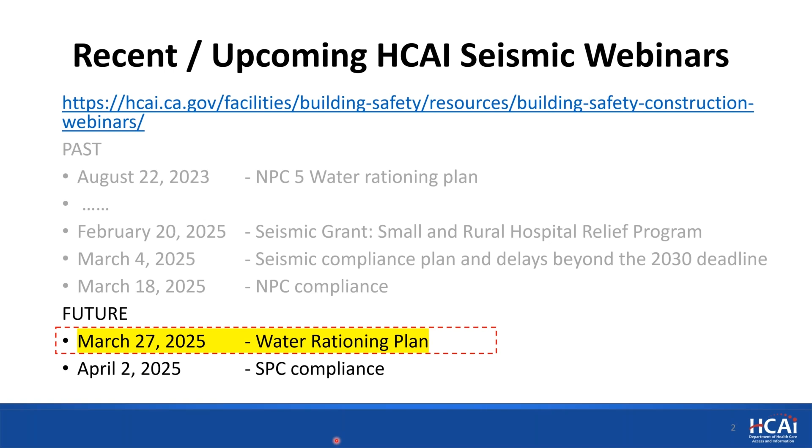Recently, Ali Sumer gave webinars on the seismic grant program for small and rural hospitals, another one on seismic compliance plans and delays beyond the 2030 deadline, and the most recent one was the NPC compliance webinar. Today's webinar is on the water rationing plan. Another upcoming webinar on April 2nd is on SPC compliance.

I recommend reviewing the previous webinar on the NPC5 water rationing plan that was presented in August of 2023. That was a 2-hour webinar and it went into much more detail regarding the NPC5 code requirements, evaluation, and report preparation. Today's webinar will focus on the submitted evaluation reports and discuss ongoing water rationing strategies, challenges, approaches, some frequently asked questions, and also we'll try to go over some examples.

Let's go over some relevant codes and their effective dates. To clarify one thing, there is no change to the NPC regulations for this upcoming code. The final express terms for the California Administrative Code were filed with the Secretary of State on February 27. These regulations will become effective on March 29th, 2025. That's 30 days after filing. Since today is the 27th, this will be effective 2 days from now.

In this presentation, we'll go over the relevant upcoming changes in the 2025 California Administrative Code, especially pertaining to timelines. One important thing to note is the 2025 Building Code is effective January 1, 2026. So there is this important distinction. The California Administrative Code will be effective in 2 days, end of March, and the California Building Code will be effective January 1, 2026.

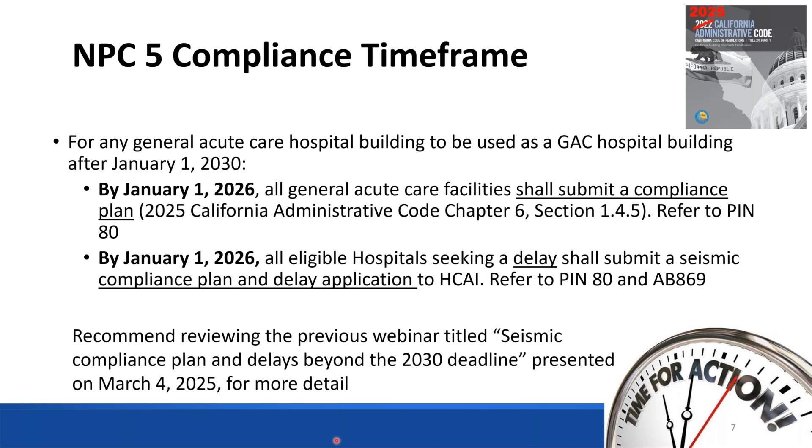The next deadline after that is March 1, 2026 for submitting construction documents related to NPC 4, 4D, and NPC 5 to the office. Note that the deadline has changed from previously being January 1 to now March 1. This change is part of the upcoming 2025 California Administrative Code.

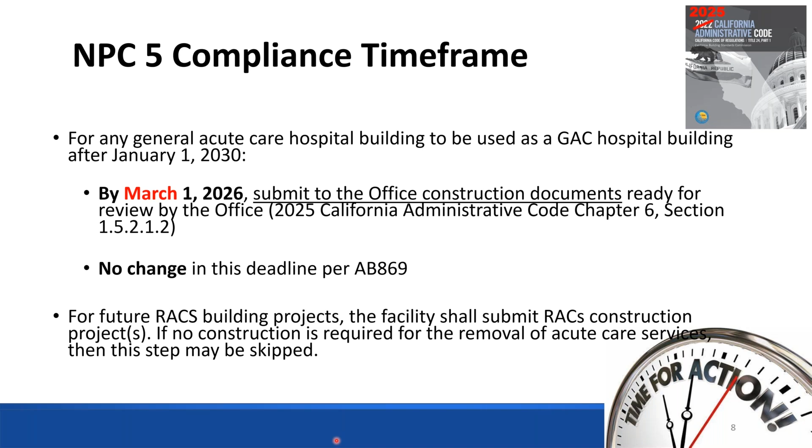For the facilities submitting delay application per AB 869, this deadline does not change. Similarly, for non-conforming buildings that are proposed to be removed from acute care, that is, the plan is to decommission or demolish, the facility shall submit a RAC's construction project. If there is no construction, then this step can be skipped.

The next deadline after that is March 1, 2028 to obtain a building permit to begin construction for the NPC compliance projects. Again, please note the change in the date from January to March of 2028. There are some exceptions in the code, but in general, the hospitals not meeting this deadline are not issued a building permit except for seismic compliance work, maintenance work, or emergency repairs. You can find these exceptions under the 2025 California Administrative Code section listed here on the slide.

Similarly, for facilities submitting a delay application per AB 869, this deadline does not change. For non-compliant buildings planning to be removed from acute care services, the RAC's construction project building permit needs to be obtained by March 1, 2028.

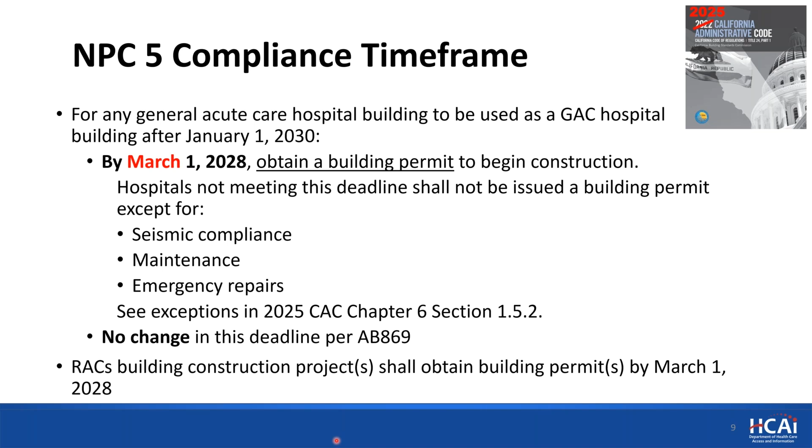So by January 1, 2030, the general acute care building shall achieve NPC 5 rating. That means finish construction, obtain a certificate of occupancy, and receive the NPC 5 rating. For buildings with approved delay dates per AB 869, they will need to meet the deadline as outlined and approved under their specific seismic compliance and delay plan. Again, as a reminder, these requirements only apply to facilities with non-compliant buildings. Compliant buildings are the ones with SPC 3 or higher rating and NPC 5 rating.

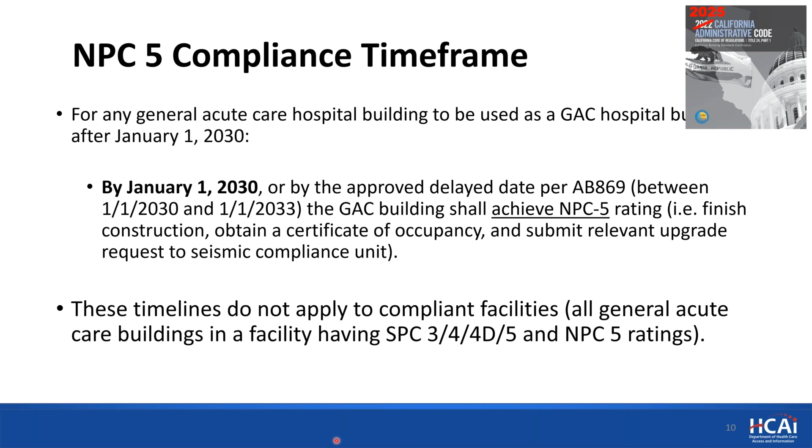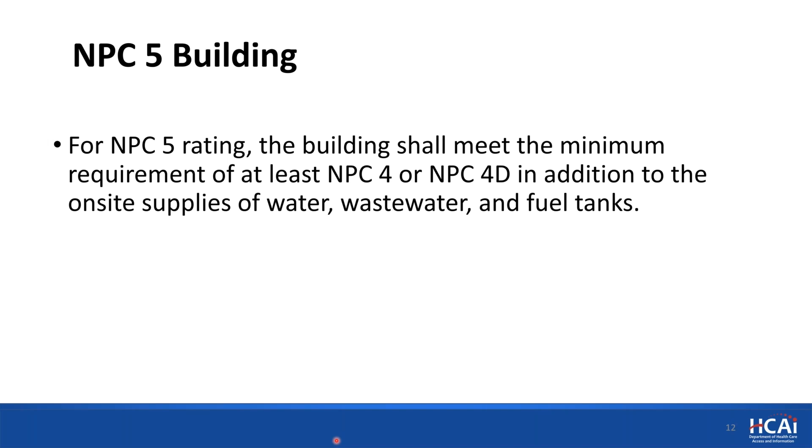Let's briefly go over NPC 5 and its main requirements before we jump into the water rationing plans. For a building rating to be NPC 5, the building needs to comply with a minimum NPC 4 or NPC 4D rating. You can see this section from the California Administrative Code here outlining this criteria. For a building to be NPC 5, the building has to be NPC 4 or 4D first. And in addition to this, it has to have a sufficient on-site supply of water, wastewater, and fuel to provide for radiological and acute care operations.

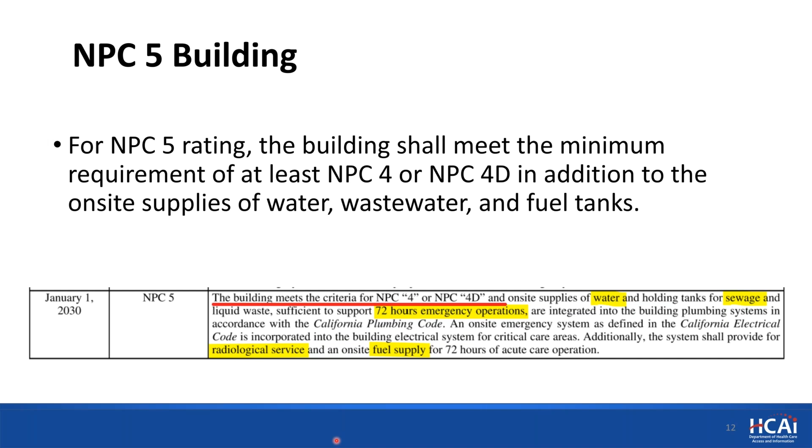This helps the hospital to be operational without outside support for 72 hours and provide emergency services in case of earthquake or other disaster. An NPC 5 compliant hospital facility is capable of supporting 72 hours of emergency operations during widespread damage caused by a major earthquake. With all major earthquakes, we have seen damage to not only buildings, but critical public infrastructure as well. The intent is to treat the hospital facility as an isolated place that is self-sufficient and reasonably capable of providing services after disaster. This is especially critical in the initial time before help from outside can start.

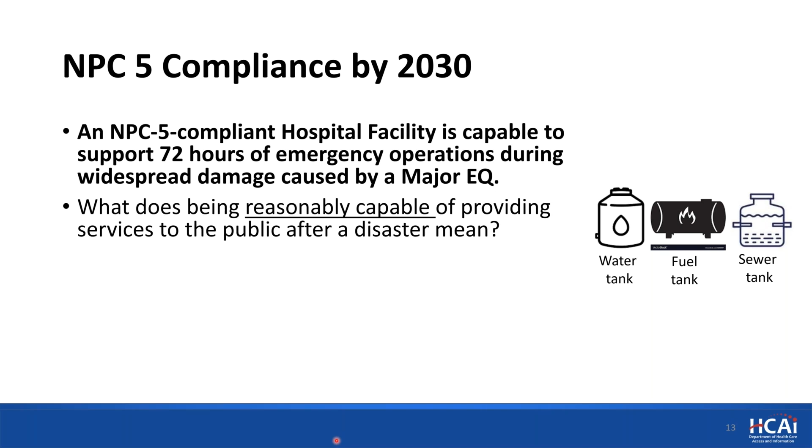So what does being reasonably capable of providing services to the public mean? For our purposes here, we are looking at these main items: water storage, which is part of the water rationing plan, wastewater storage, radiological services, and fuel storage for e-power or for the emergency generator. Then on individual building level, we want to look at bracing, and last but not least, the structural performance of the building. SPC 3 or higher rating is considered a compliant building. Again, our presentation today is going to go over a portion of the NPC 5 requirements that are specifically related to water and wastewater.

The code requirements are listed across multiple locations. California Administrative Code provides the definition of NPC 5 building under Table 11.1 and also timelines and deadlines under Section 1.5.2. California Building Code has NPC 5 requirements for new construction. California Plumbing Code has information on the minimum water requirements under Chapter 6, and it has the wastewater requirements under Chapter 7. Similarly, California Electrical Code provides references to NFPA 101 and 110 for the on-site fuel requirements.

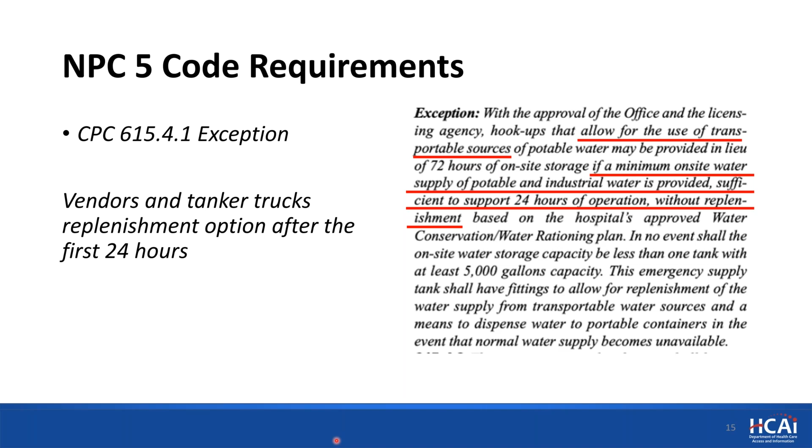Just briefly talking about tanker truck exceptions. This is an important exception in the code that's being utilized under multiple proposed rationing plans. This exception allows for replenishment of water as long as a minimum of 24 hours of water is provided on site, and the contracts with vendors are made for the second and third day to maintain 72 hours of continued operations. We'll go more into details later on the tanker trucks and vendors in today's presentation.

Now going over some updates and improvements we have made recently to the NPC 5 application process. The original applications were submitted for each building separately. To help streamline the application process, since the initial submission, we have made further improvements to allow for a single primary NPC 5 project that is related to multiple buildings. This effort will save time in the long term and simplify the process. When submitting back check responses, please use the primary project number.

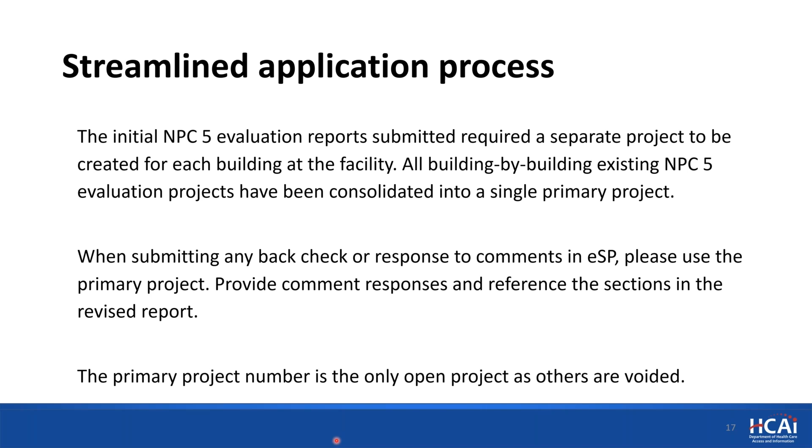Except for the primary project number, all other project numbers are voided. So when submitting the rationing plan, please be clear in mentioning all the buildings the evaluation report applies to. Essentially, all general acute care buildings that plan to remain operational beyond 2030 need to be NPC5.

This includes canopies, equipment yards that might not require water, wastewater, or fuel. Just to clarify why we are asking for this is because we don't know if these canopies or structures require water or e-power. It might be obvious for the facility or the design professional familiar with the facility. So the design professional can state that these structures don't require connection to water, wastewater, or fuel, but as long as it's included in an NPC5 report, that should be good.

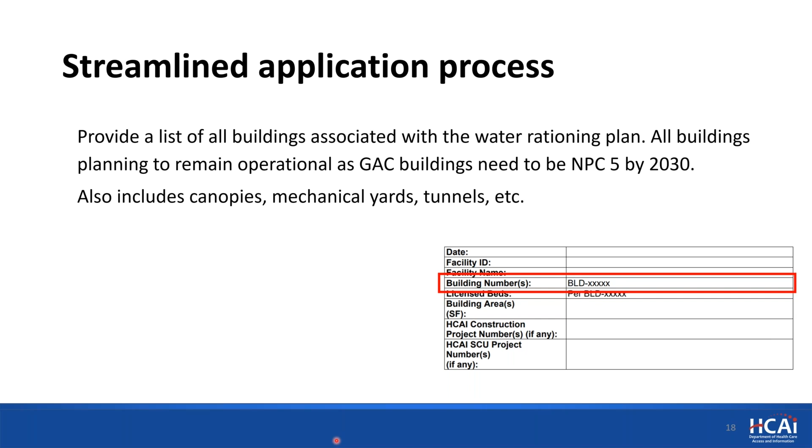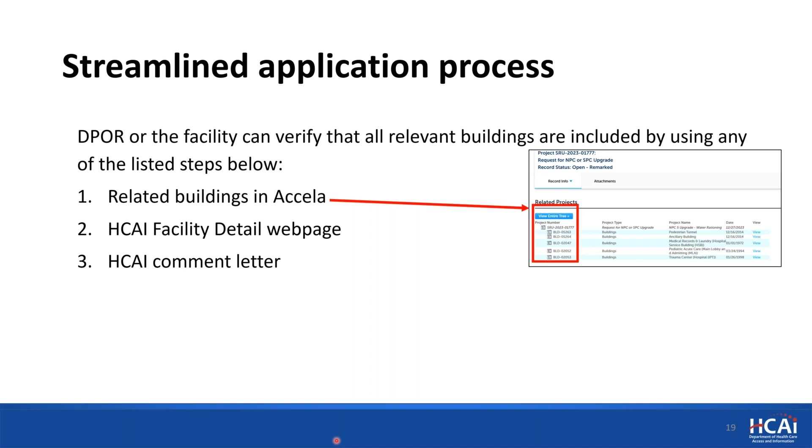On your side, there are many ways to confirm as a design professional or owner that all the buildings are included and no building was accidentally missed. You can check eServices for all related buildings under your parent project number. You can check the HCAI facility web page to see if the report for the building was submitted or not under the NPC status. I'll go over this a little more in detail on a later slide, since there is some good information on this webpage.

Another option is to look at the remarks letter that was issued, as it provides a list of all the buildings related to the NPC5 upgrade project. If you see any building missing, please update your report or reach out to us in case we missed it. We want to make sure that for each facility, all non-compliant acute care buildings have NPC4 and NPC5 evaluation reports submitted, or there is an intent letter submitted.

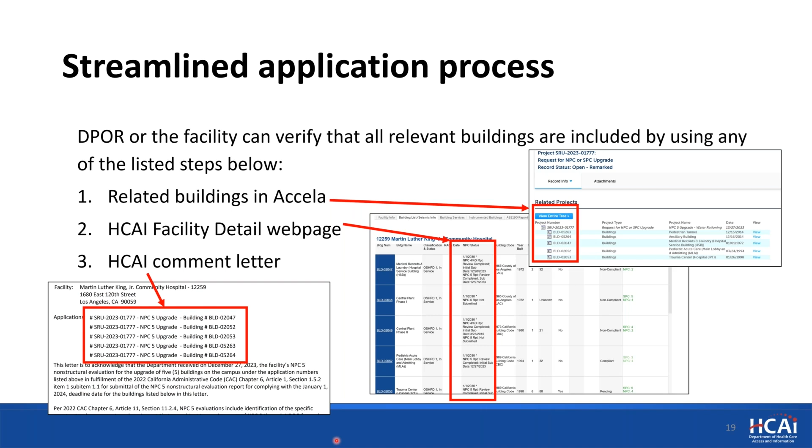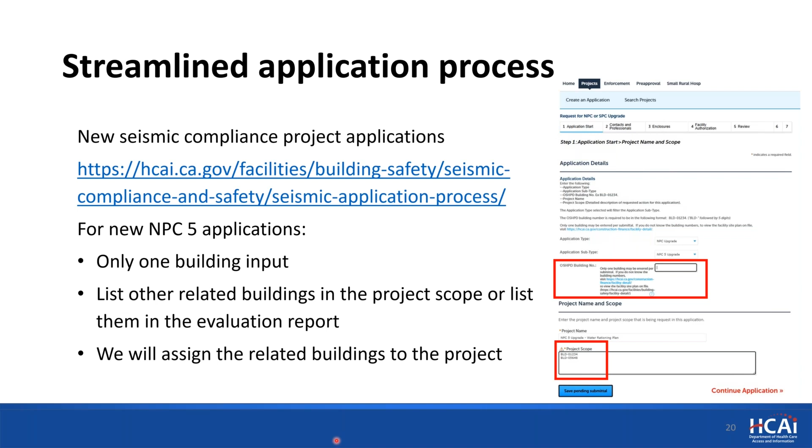For the few remaining facilities that might be submitting NPC5 upgrade for the first time using the electronic application, you will notice that you can only include one building as part of the application process. We recommend you include the list of the remaining buildings under the project scope, and we will assign them to the related buildings for the NPC project. You can always go and check the current status of the NPC evaluation reports on our website. The link is shown here.

Let's see a few different examples and how you can check the NPC status. The first row shows a scenario where the facility owner has decided to remove the building from general acute care by 2030. As such, the intent letter stating the intent to remove from acute care was submitted and received by our office. In the second row, you can see the NPC status description showing NPC 4 report was submitted and accepted. NPC 5 report review was completed, which means it's now in the design team's court.

The third row is an example in which a building in the campus was not included in the submitted NPC 5 report. Now, if this was accidentally missed, please update the report to include it. Since the building is already NPC 4, the evaluation report for NPC 4 or 4D is not required. Therefore, there is no mention of it on the status there, and only NPC 5 status is mentioned. The last row is an example of a compliant building, so there is no NPC 4 or 5 evaluation required. Hence, there is nothing shown on the NPC status column.

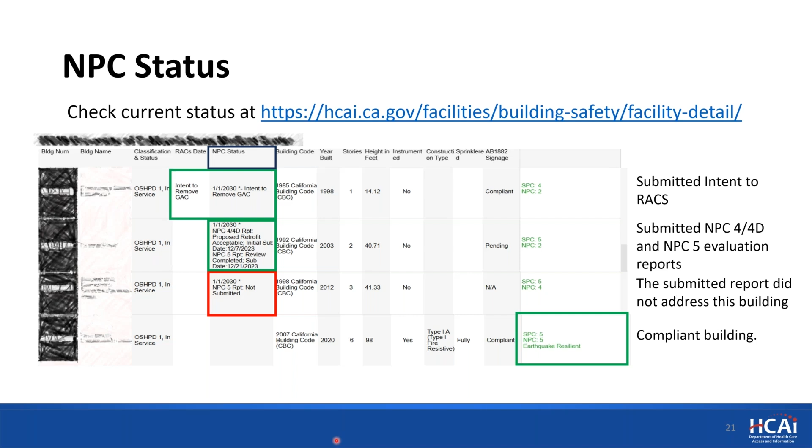Sometimes providing such a large tank is unfeasible due to space or financial constraints. And moreover, we understand there will be lower water usage in an emergency. Things in an emergency are different from normal operations. The focus will shift and be on critical and emergency care, and other non-critical services will not be given the same priority.

One thing we noticed in the submitted reports with existing water usage is that small rural facilities have lower water usage when compared to large urban hospitals. And hospitals that are controlling temperature with water-cooled systems use significantly more water than air-cooled systems. The water usage is larger for inland facilities where the weather is more extreme. So this is just giving kind of a big picture of water usage of facilities that we have seen so far.

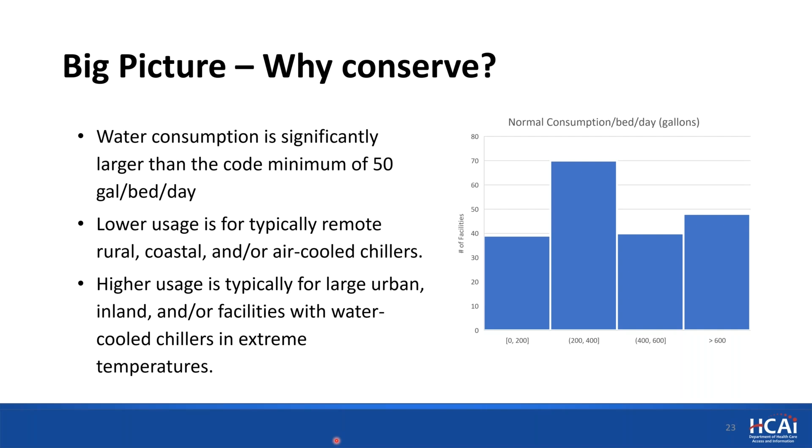We have an A5 guide on our website to help you prepare the water rationing plans. This was originally published in August 2022, I believe. We went in detail on preparing the NPC 5 reports and going over the A5 guide in our previous webinar, which was in 2023. So I'll not repeat that information here.

We recommend always going to our website to look for the latest version of this A5 guide. The current version is from May 2024. There are no new requirements in this revised A5 guide. We did make some minor editorial changes. The e-power discussion on cooling equipment is clarified under this new version, and I'll go over it later on in the presentation in more detail.

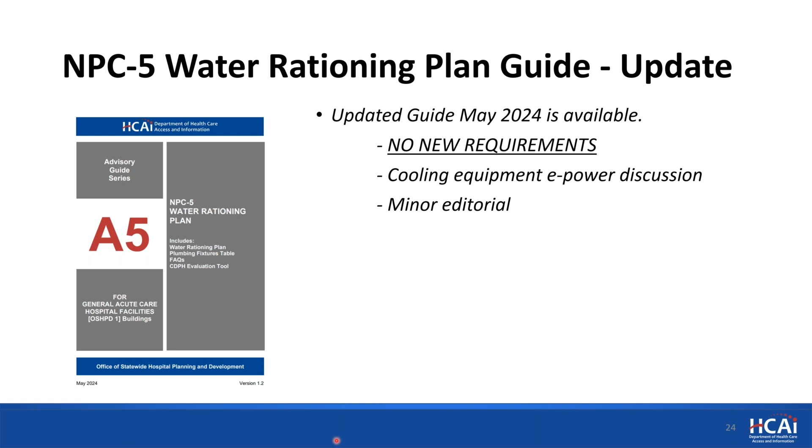So when discussing water rationing plans specifically, these are the documents that are required to support the evaluation report. The first item is existing water usage bill. This sets up the benchmark and brings into perspective the actual water usage under normal conditions. We recommend including an executive summary, which helps understand the proposal more uniformly since there are multiple aspects to an evaluation report and goes in very detail, and sometimes important information could get hidden in the whole report.

In this executive summary, we would like you to include the existing water or water storage on site if there is any, the source of emergency water supply, whether it is on-site tank or well supply, any proposed future construction for water storage where existing water storage is insufficient, what is the anticipated water usage in emergency. This would be based on the water rationing plan itself, and also include if there are any tanker trucks proposed as part of the replenishment option.

Within the water rationing plan, we'd like you to include the impacted services in the building. This is the portion that's very closely reviewed by CDPH, which is the licensing agency. Other calculations related to temperature control or supporting calculations to identify water usage shall be submitted for review. We don't require plans for evaluation report, but if submitting floor plans helps understand your rationing plan, you can attach them in the report. Now going into some examples.

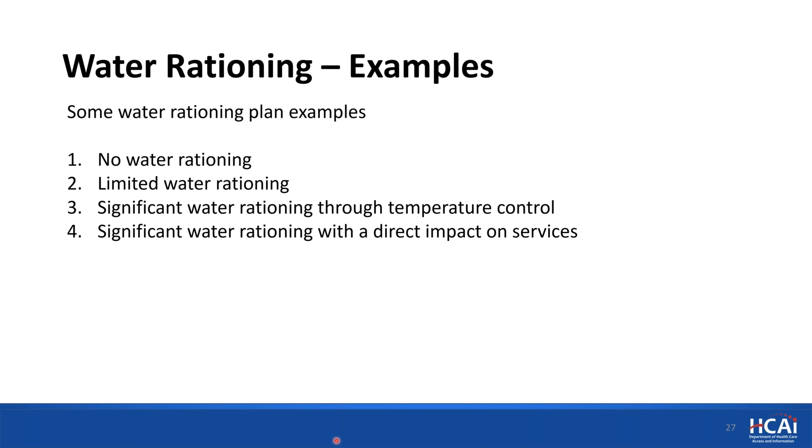In the next few slides, I'll go over a few examples of the typical water rationing plans we have seen proposed and the approaches used to conserve water. As you can see on this slide, we have examples divided into four categories. These categories try to address the typical rationing reports we have received. The first example is no water rationing. Then second is with limited rationing. Third example is significant rationing through temperature control. And the last is a significant rationing example with direct impact on services.

In all the examples, to show the different levels of rationing, we considered a 120 licensed bed general acute care facility having its water consumption at approximately 61,600 gallons per day, which is based on the maximum monthly average. The minimum code requirements for this example facility for the on-site water tank would be based on the facility's water rationing plan, but the tank itself cannot be less than 5,000 gallons, or 50 gallons per day multiplied by the bed count multiplied by the number of days. So for a 3-day on-site requirement, it comes out to be, in our case, 18,000 gallons, and for 1 day where vendors are chosen as water replenishment option, it comes out to be 6,000 gallons on site.

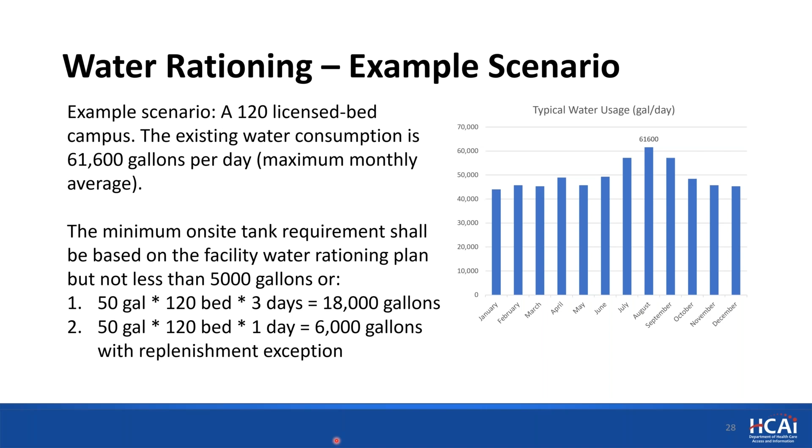When submitting water rationing plans for the existing campus, please send us the most recent annual water bill. In case of unusual peaks or low outliers in the water bill, you can provide us justification. Sometimes there is ongoing construction or a leak that might cause unusual volume of water usage in a month. But providing at least 1 year of water bill helps us understand the variation through the months.

When working on water rationing plan, the gallons per day from the highest water month consumption should be used, as this is already an average over a month, and natural disasters can happen any time of the year. So choosing an average of annual consumption would underestimate the water usage in peak summer months, especially when the peak is significantly higher for facilities using water for cooling and are located more inland where the weather is more extreme.

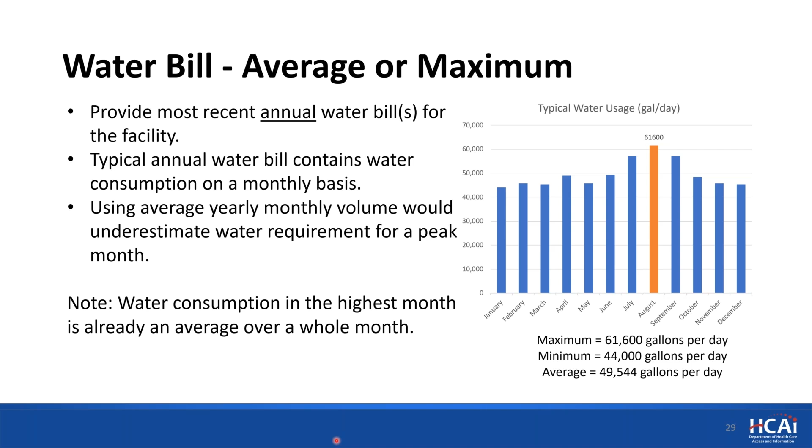So in this example of no rationing, with the water bill showing 61,600 gallons per day, let's assume the facility has space to install this. So it comes out to be 184,800 gallons for the 3-day on-site tank requirement. Now, assuming 10 to 15% extra for the unusable quantity, which is typical per manufacturer recommendations, this roughly translates to a 205,000 gallon tank for both water and wastewater.

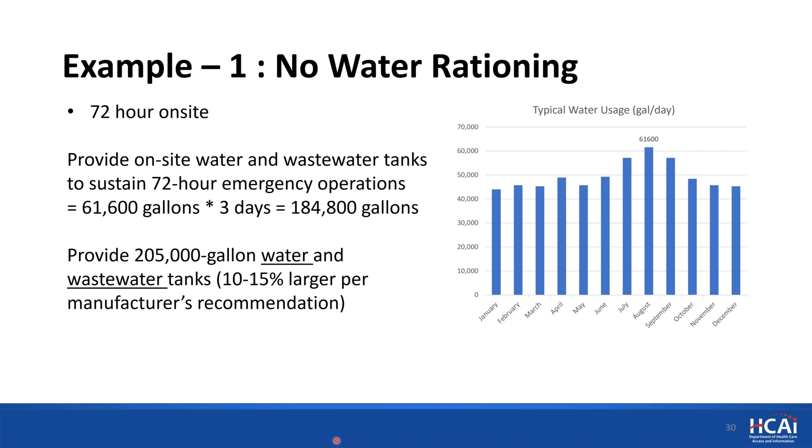Again, for this example, the facility has an option to propose using vendors for the second and third day by using the code exemptions. We recommend the facility perform their due diligence before proposing to use vendors. The most common tanker truck size we have seen is 4,000 gallons, which is readily available. Limiting the refilling frequency to be no less than 2 hours, the maximum water that can be delivered on site in 24 hours is approximately 48,000 gallons. We understand some cases are unique, but when proposing unusually large tanker size, we might need further documentation to confirm the proposal.

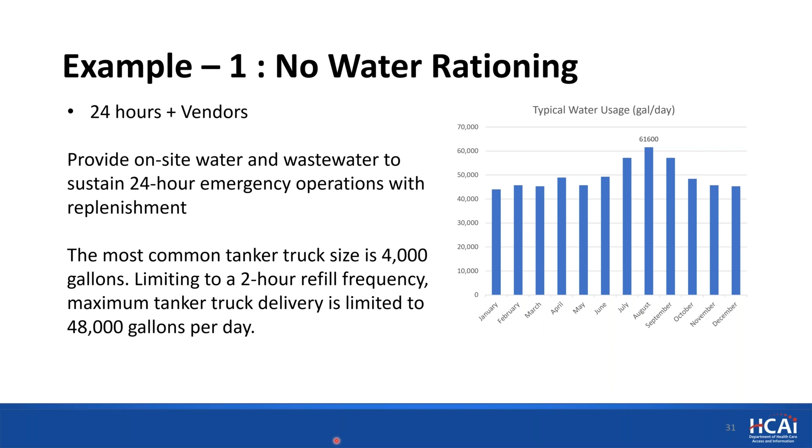Performing a quick check with this 48,000 gallon refilling limit per day, we can see that the on-site first 24-hour tank size requirement is approximately 88,800 gallons. In your specific case, the vendor might only be able to deliver 30,000 gallons or maybe 60,000 gallons per day. So this is something specific to your site and should be reviewed prior to proposing the site plan. The rationing plan, I meant.

Please note that the tank size shall be larger than the first 24-hour water requirement for the facility. You can try to have a contract with a vendor to have it delivered before 24 hours, but the minimum code requirement is to sustain 24 hours of operation with on-site water supply. So the tanks shall be sized at a minimum to sustain 24 hours of operation without tanker trucks from outside. We get approximately 100,000 gallon on-site tank requirement when we account for an unusable quantity in this case.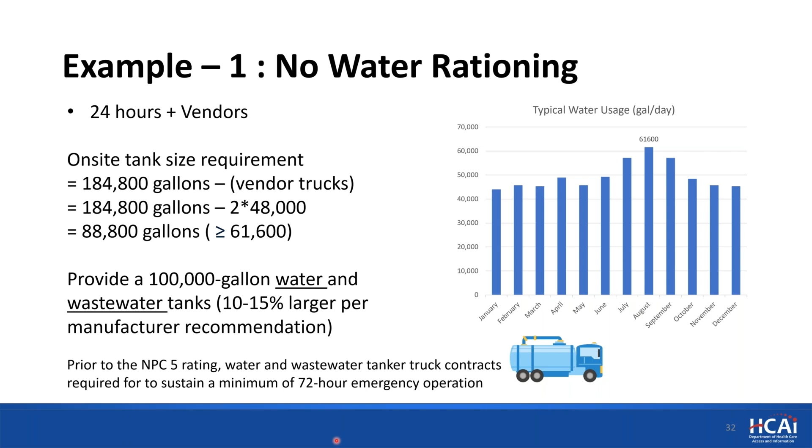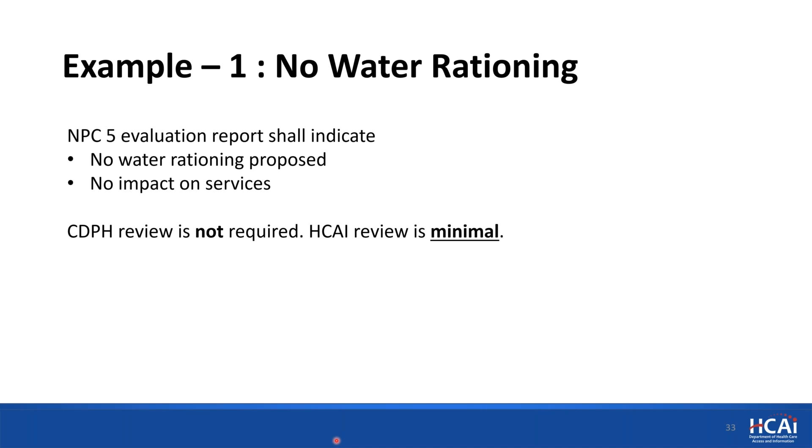Since this water rationing proposal relies on continuing operations with delivery trucks, these contracts shall be in place prior to NPC 5 request. So in this first example, it was without any water rationing. The evaluation report for such category shall clearly indicate there is no water rationing proposed and there is no impact on services. In such reports, there is no CDPH review necessary since there is no impact on services, and HCAI review will be minimum as we are just making sure that the existing water bill is accurate and covers all the buildings on campus.

Now, for example 2, in this example, the water rationing is limited, but there is no general impact on acute care services provided by the facility. There could be many ways to achieve this, but we will go over the most common methods we have seen so far. The water rationing could be targeted where the reduction is limited to non-GAC buildings or irrigation. Now, if the design professional through calculations or water meter data can quantify the non-GAC and irrigation demand, the on-site tanks can be sized for the remaining demand.

For irrigation, we recommend confirming the water supply is not through a separate meter, as it's very common to have irrigation water supply separately. For reducing water by discounting non-GAC buildings, the water consumption between non-GAC versus GAC buildings can be estimated by full-time employees, square footage, services provided, plumbing fixtures, etc. Due to the type of the services provided, GAC buildings typically have higher water consumption per square foot compared to non-GAC buildings. So this should be properly accounted for in the supplemental calculations, unless there is meter data to justify the breakdown.

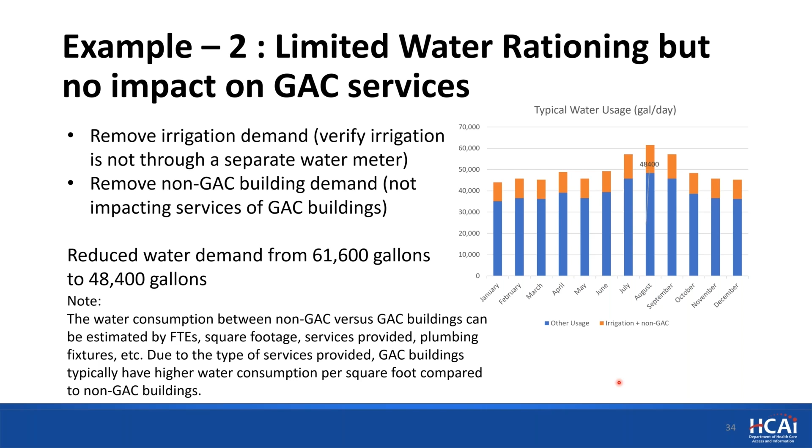So in our example, let's say with the supporting calculations, we were able to reduce the water from 61,600 gallons to 48,400 gallons. Again, using the same methodology, the 3-day water demand is 145,200 gallons, which roughly translates to 160,000 gallon usable tank. Now, if proposing vendors for second and third day, doing the same calculation, the tanker truck replenishment not exceeding 48,000 gallons per day, the minimum tank size for the first 24 hours comes out to be

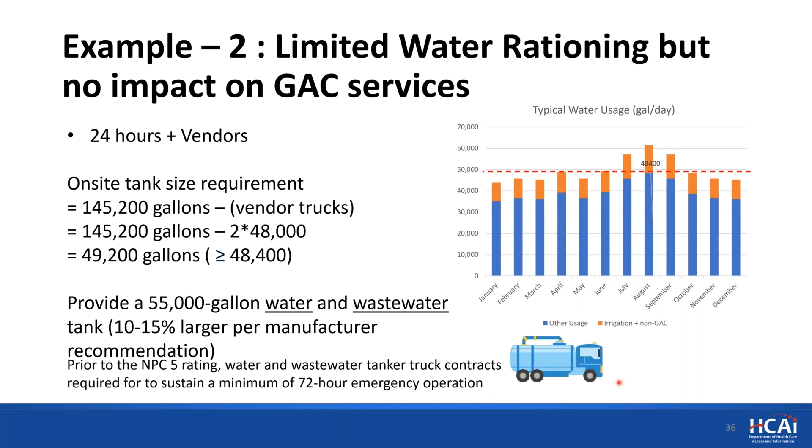49,200 gallons. Again, make sure that this size is larger than the first 24-hour demand, which in our case is 48,400 gallons. Now, this would translate approximately to 55,000 gallon usable tank when accounting for the unusable quantity. Again, this proposal relies on delivery trucks. These contracts shall be in place prior to NPC 5 request.

So in summary, example 2 was with limited water rationing. The rationing was carefully targeted for non-acute care buildings or irrigation without any impact to general acute care services. The evaluation report for such categories shall clearly indicate that there is no impact on the services, and the water rationing is limited to non-essential usage that can be temporarily shut off during an emergency. And this should be part of the facility emergency plan.

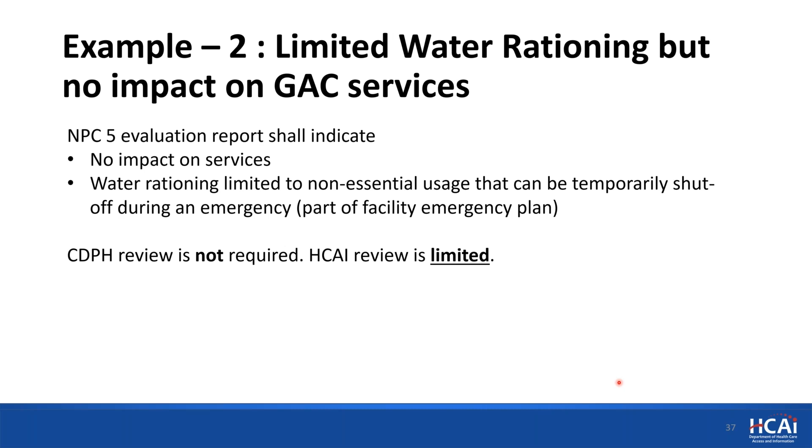In such cases, again, no CDPH review is necessary since there is no impact on services. HCAI will be limited to verifying the supporting calculations that are submitted to justify this reduction in the non-acute care water usage side. Now let's go over example 3.

In this, we are targeting rationing through temperature control. Most facilities rely on water cooling systems to maintain temperature on their campus. For inland facilities where weather is extreme, there is large water consumption in cooling towers. With regular blowdowns and evaporative losses, this can be a significant source of water usage. Targeted temperature control is another strategy that could be used to reduce water consumption.

Please note at a minimum, the facility should provide industrial water to heat, cool, and humidify operating rooms and temperature-sensitive drugs and medical supplies. So shutting down cooling to the entire hospital is not an option, as it will mean that the operating rooms and temperature-sensitive drugs don't have temperature control.

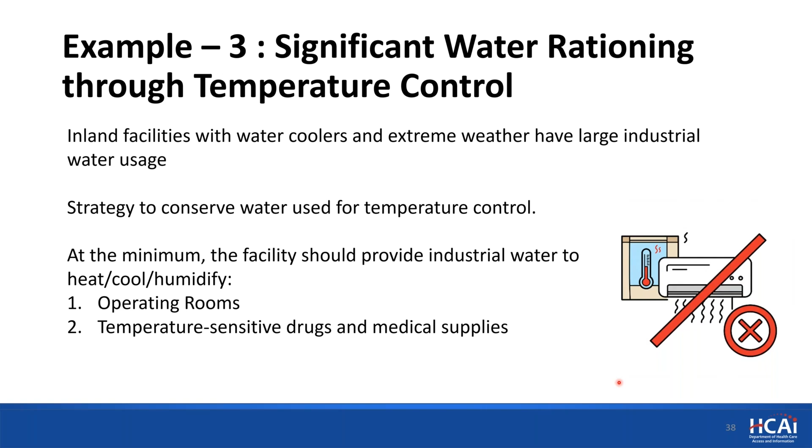One of the most common methods used in calculating water demand for temperature control, or water used by cooling or heating, is the 8760 bin and weather analysis by the mechanical engineers. These calculations can be performed based on the nearest site's available temperature and humidity recordings.

Again, understanding the facility operating standards, such as the frequency of blowdowns, the target room temperature set by the facility, and the equipment information, is also important in calculating the water usage. You can eliminate blowdowns during emergencies to conserve water, but in calculating the percent of consumption of an existing bill, it's important to understand what the facility standards are to calculate that volume.

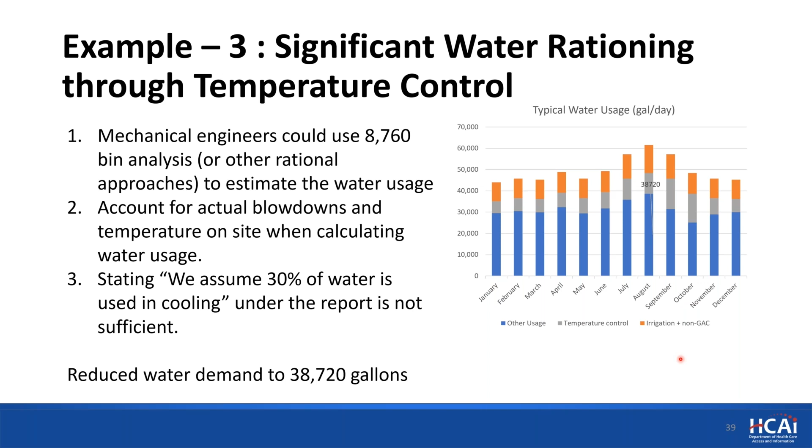For our example, let's say with the detailed analysis, we were able to reduce the water usage to 38,720 gallons. This is by limiting cooling to selected regions and maintaining cooling at the minimum required locations. When limiting cooling to certain regions to conserve water during an emergency, please provide an overall layout for chillers, cooling towers, and air handlers serving the rooms and departments.

When providing extreme reduction in loads, provide relevant equipment cut sheets to justify the minimal operable load for these equipments, because some of these can't run under certain load. If there is any other construction required to achieve this transition, please list it under the water rationing plan.

Just limiting cooling to OR and pharmacy might not be feasible, as the system might provide temperature control over a larger area. Some construction might be required to target specific rooms to achieve this.

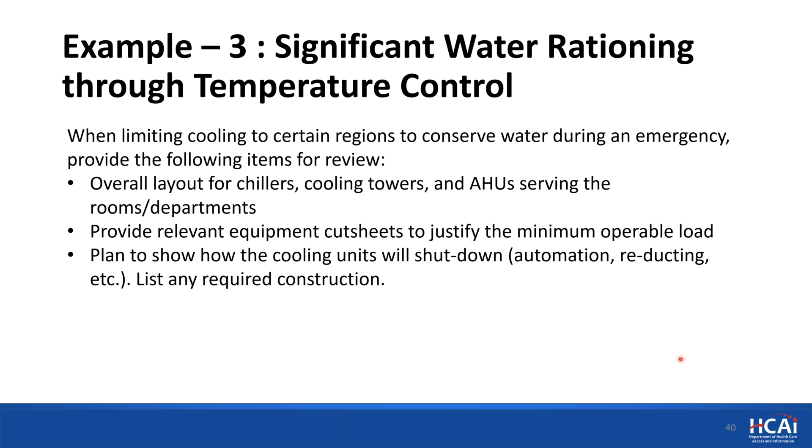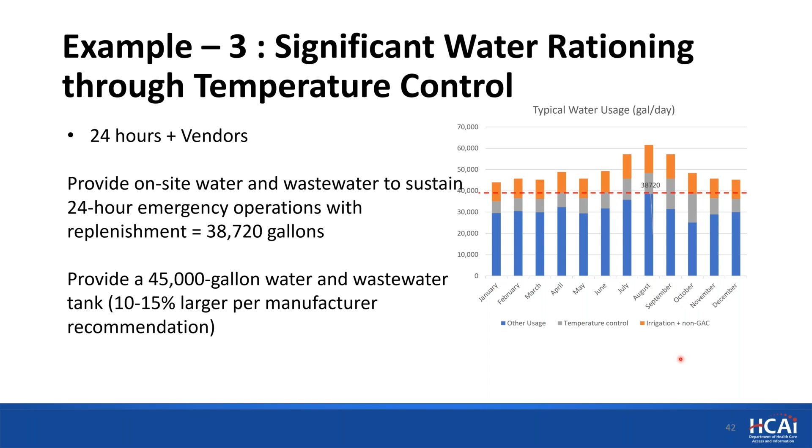So using the same methodology, the 3-day on-site demand approximately comes to a 130,000 gallon tank when you account for the unusable quantity. Again, if the proposal is using vendors for the second and third day, this translates to roughly a 45,000 gallon tank on site. Again, these contracts shall be in place prior to the NPC 5 request.

For water rationing plans with such proposal using temperature control, please identify under which department. I'm sorry, I heard a beep. Can you hear me, Kelly? Yes, I'm having no issues hearing you, Kamal. Thank you. I've lost my chain of thought there.

Sorry. For water rationing plans that use temperature control, please identify under which department temperature control is impacted. The table shown here is from the A5 guide. The idea to provide a separate column for temperature control was that it does not mix with the direct impact on services, especially in cases where only temperature control is implemented as part of the rationing measure.

The California Mechanical Code Table 4A provides acceptable temperature and humidity ranges for the rooms. It's included as a footnote under this table for reference. Now, in such water rationing plans, CDPH review is minimal. HCAI review will be comprehensive to verify the supporting calculations. Please submit any assumptions made in the calcs that are needed for a review.

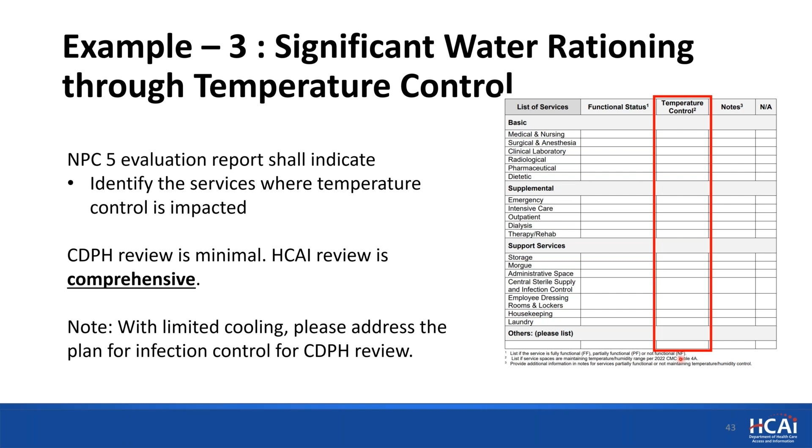Now let's look at another example in which significant water rationing is proposed with a direct impact on GAC services. This could be required due to space or financial constraints for not being able to put a larger tank size. Note that this is not the same as the minimum code requirement of 50 gallons per day per bed. The amount of water required shall be based on the facility's emergency operation plan and the associated water rationing plan to provide 72 hours of operation.

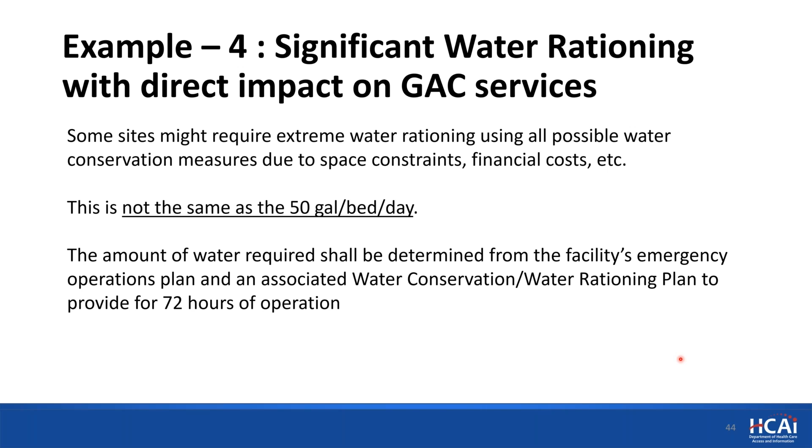Some examples for direct water usage reduction: calculating emergency water usage by plumbing fixtures based on estimates such as number of patients, doctors, nurses, daytime versus nighttime staff, or any other support staff. You can try to estimate the plumbing water requirement. It might be tricky sometimes, but this is where having discussions with facilities helps putting some numbers together.

Limiting ORs, this is something that will be reviewed by CDPH on a case-by-case basis. It is understandable to have limited ORs running only for critical patients during an emergency. You can propose something such as 5 out of 8 or 10 out of 20 ORs will plan to remain operational. A more extreme case, having 1 OR out of 10, might not sound like an operational plan, but again, this is something

CDPH will review. This reduction in operating rooms under emergency could be based on the fact that you can efficiently only provide cooling to certain limited ORs, and providing cooling to other ORs might have a large impact on your water tank size, or other facility considerations might be relevant. But you can propose some reduced quantity if that is the plan. But please be clear on what total number of ORs are in the facility and what's proposed to remain operational.

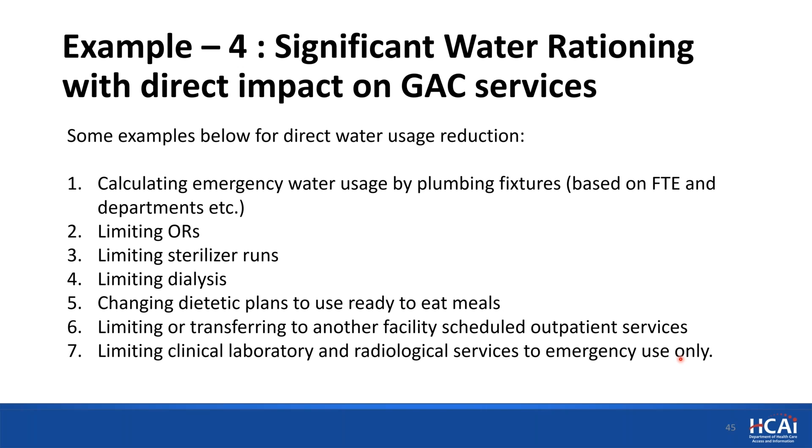When choosing this rationing method, please provide a detailed description of the impact on all services, basic, supplemental, support services, alongside the proposed emergency plan. When an emergency happens, continuing operations as normal is not practical, and there will be impact on provided services. So if you list all the reductions in capacity or services and modifications to the staff procedures, this would help us at CDPH review your plan.

We also recommend reviewing the CDPH policy and procedure checklist that is attached in an appendix to the A5 guide. Again, we are asking you to tell us what you're expecting to remain functional or partially functional or not functional. If there are areas that you can do without, like admin spaces, then you can reduce water over there.

But when it comes to basic services, just saying we're going to discontinue this service, or saying that we're going to go dry, CDPH is pushing back on those statements. So we recommend looking at these services and aiming for something less, not eliminate, but provide services in a reduced capacity if it helps conserve water.

Again, to emphasize, the section shall be filled by the facility representative or a design professional based on the input from the facility. The impact on the services shall reflect the proposed reduction in water usage. As you can probably guess, for such evaluation reports, both CDPH and HCAI reviews are going to be comprehensive.

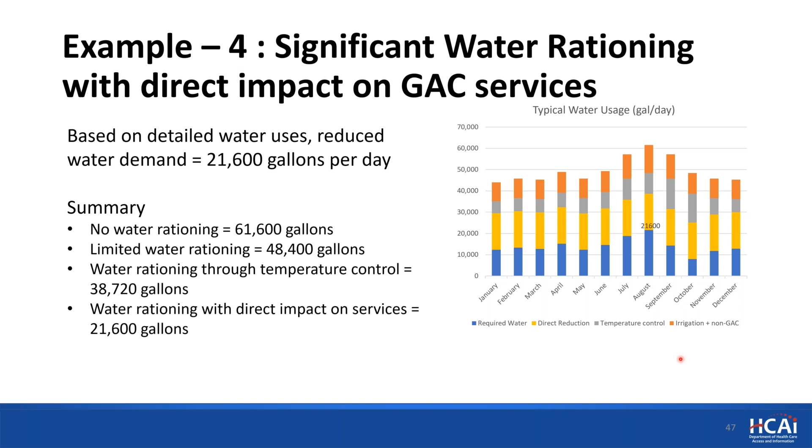When targeting reduction in water usage with impact on services, please provide a detailed breakdown as shown. This table is in the A5 guide for reference. It also includes the proposed percentage reduction for each water usage. This helps us correlate the proposed impact on services.

One thing to note here is that for wastewater tanks, you can eliminate blowdowns and reduce the storage requirement to 19,000 gallons in this specific example. You can also target other water uses that might not go downstream to wastewater.

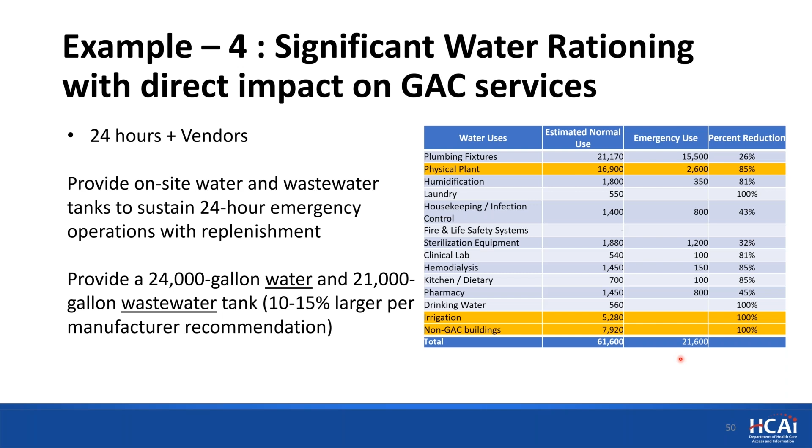For this case, the 3-day on-site requirement translates to a 72,000 gallon water and 65,000 gallon wastewater tank when accounting for the unusable quantity. Again, choosing the code exemption and using vendors for the second and third day, this would translate to 24,000 gallon water and 21,000 gallon wastewater usable tank size. Again, these contracts shall be in place prior to the NPC 5 request.

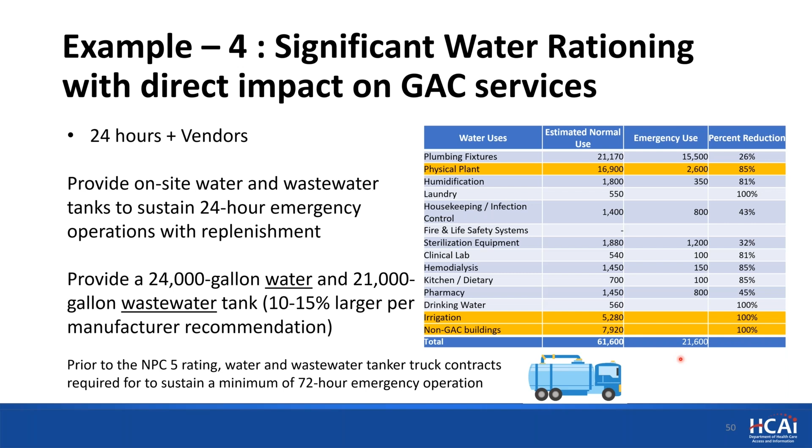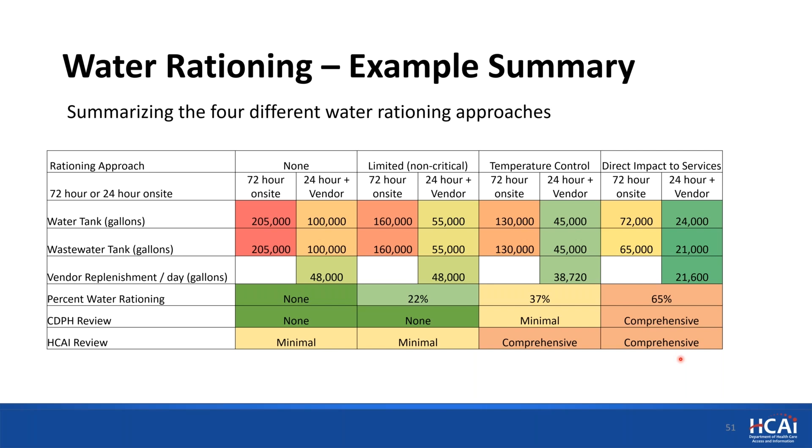This slide is just summarizing how, depending on facilities' needs and requirements, the water and wastewater tank size can vary. As you can see, the maximum tank size was 205,000 gallons for water and wastewater with no rationing, and it goes down to a 24,000 gallon tank for water and a 21,000 gallon tank for wastewater, with tanker truck contracts, when choosing more significant water conservation measures. And similarly, the depth of the review from CDPH and HCAI depends on how much water is rationed.

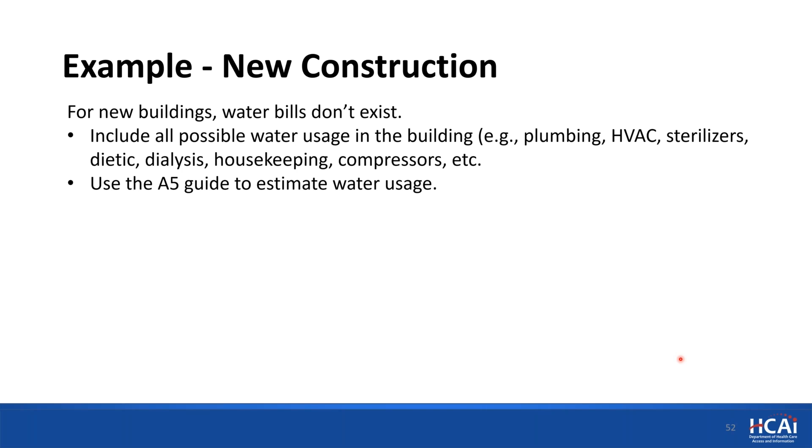All these examples focused on existing buildings. With an existing building, we have a water bill to give us an idea of the water usage. But how to estimate water for new construction? A similar concept applies to new construction as well. Water usage can be calculated based on the proposed departments, plumbing fixtures, square footage, equipment usage, and other services. We have some guidance in our A5 guide to help you calculate the usage.

Again, as a reminder, your typical normal usage is 400 to 500 gallons per day per licensed bed for a typical hospital facility. So when proposing a smaller volume of usage, please make sure the impact on services is reflected proportionally.

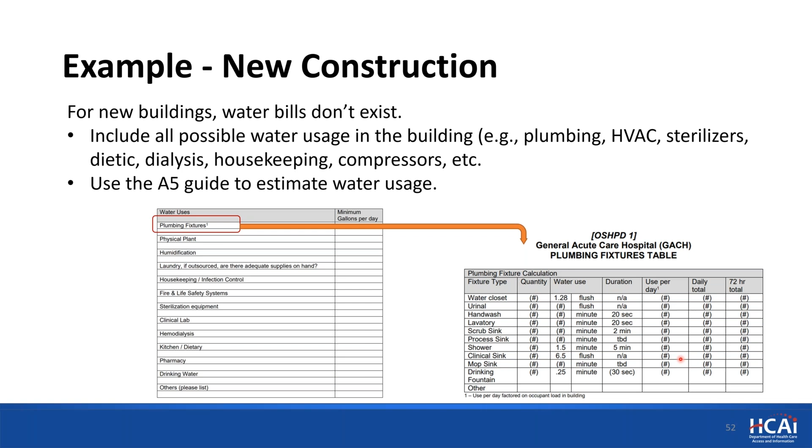We have this slide to help clarify the impact of new construction on deadlines in an existing campus. For new buildings in an existing campus that are going to complete construction prior to 1/1/2030, the new building shall be NPC 5 prior to getting occupancy as part of the California Building Code requirement. If proposing vendors, these contracts also need to be in place.

For the existing campus, NPC 5 compliance shall be achieved by 1/1/2030. Now, if the tanks are the same, you can tie them to the campus buildings and achieve an NPC 5 rating for the campus. Again, if there are vendors, the contracts need to be in place.

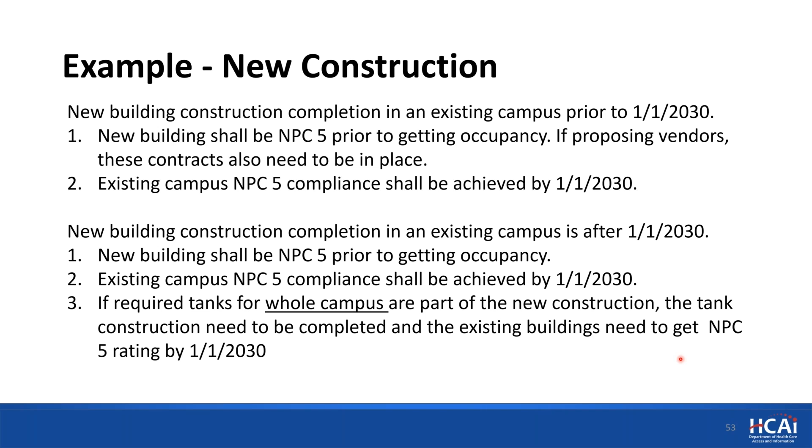Now, if a building's construction completion in an existing campus is after 1/1/2030, the new building shall be NPC 5 prior to getting occupancy. But for the existing campus, NPC 5 compliance shall be achieved by 1/1/2030. So if the tanks needed for the whole campus are part of the new construction, the tank construction shall be completed and the existing building needs to get the NPC 5 rating by 1/1/2030.

Before we move on to the other items in the presentation, I want to share the extent of water rationing in the evaluation reports that we have received so far. This chart shows the ratio of the proposed water under the rationing plan to the normal day-to-day usage. As you can see, there is a good distribution of the amount of rationing being proposed.

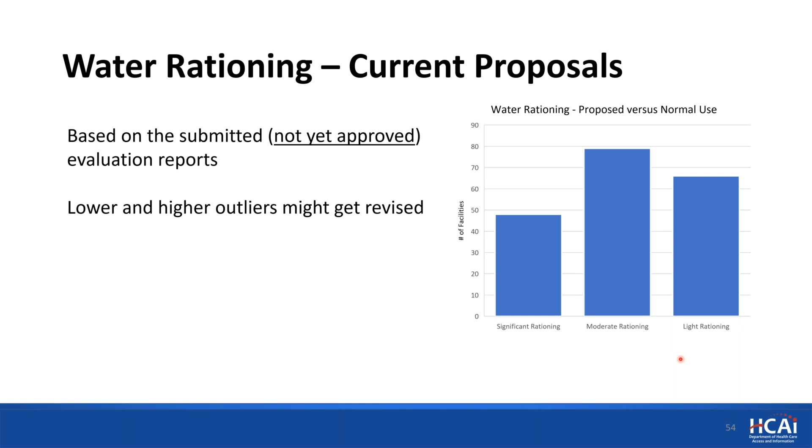Again, these are not approved reports. These are initial, based on our comments from HCAI and CDPH. Our guess is that some of these outliers, which are proposing significant rationing or very light rationing, might come towards more moderate rationing as reviews continue. Now, let's go over some examples to see some other frequently asked questions in rationing plans.

Vendor trucks. A few things to consider. Make sure that the refill connection locations allow for placement of tanker trucks, so the connection point should be accessible. If the tankers are large in size, then have a structural engineer review the loading if it crosses over tunnels or existing underground buildings. When proposing tanker trucks, please indicate the proposed refill time.

As we mentioned in our example, we saw how it has an impact on the on-site tank size. Having a 2-hour frequency is already pretty limited, considering that you have to do a manual connection, you have to fill, then you have to remove the hose. 2 hours is already a pretty tight time to work with. So we recommend you do your due diligence to see if vendors are available prior to proposing this option.

Please provide us the name of the company, contact person and contact number, length of contract, and the quantity of water or wastewater per day that the contractor has agreed to deliver. Clarify how the contract will be monitored, if it is part of the emergency operation plan, to make sure contracts are kept in place and do not lapse. Again, the contract is required when the buildings are ready for NPC 5 rating, but making sure there are reasonable options available will help alleviate any potential risks in the future.

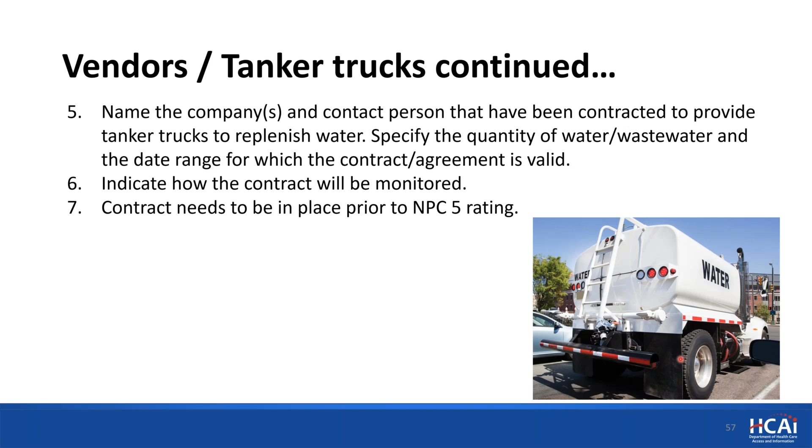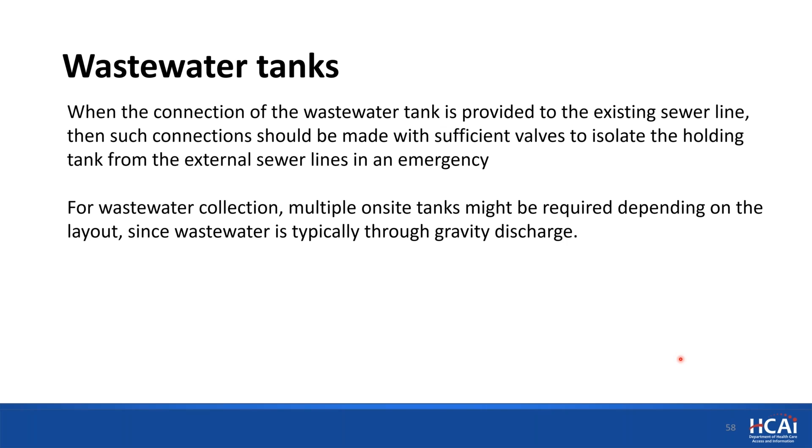When providing wastewater tanks, the connection to the existing sewer should be made with sufficient valves to isolate this new holding tank from the external sewer lines in an emergency and prevent backflow. Another important difference is that water flow is typically pressurized, whereas wastewater flow is by gravity. Depending on the facility layout and main sewage line, multiple tanks might be required to accommodate this requirement. We talked about this a little earlier. The size of wastewater tanks might be smaller due to evaporative losses in cooling towers or services that don't discharge water into sewage.

Also, there is a plumbing code exception, and one of them is leak-proof bags. They're basically very big bags that you can store on site, and you can just roll them out in case of an emergency. You can use these in different places like parking lots, as long as there are hookups. The important thing to note here is that a minimum size of 24 hours for the holding tank is required on site to match the minimum 24-hour on-site water tank requirement. These leak-proof bags may be used after the initial 24 hours to meet the 72-hour on-site capacity requirement.

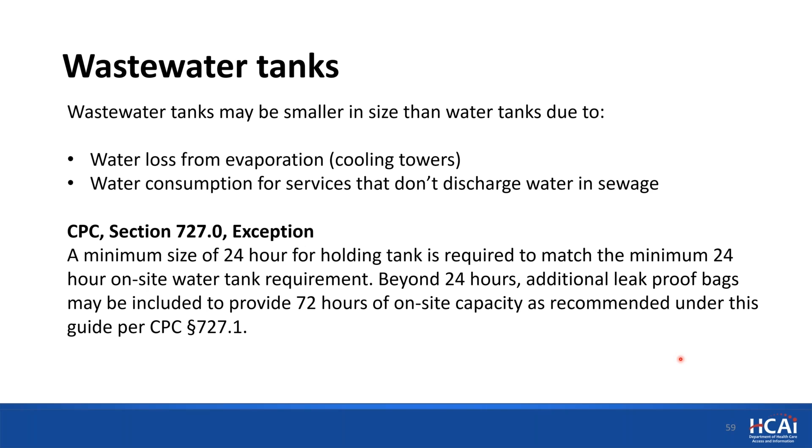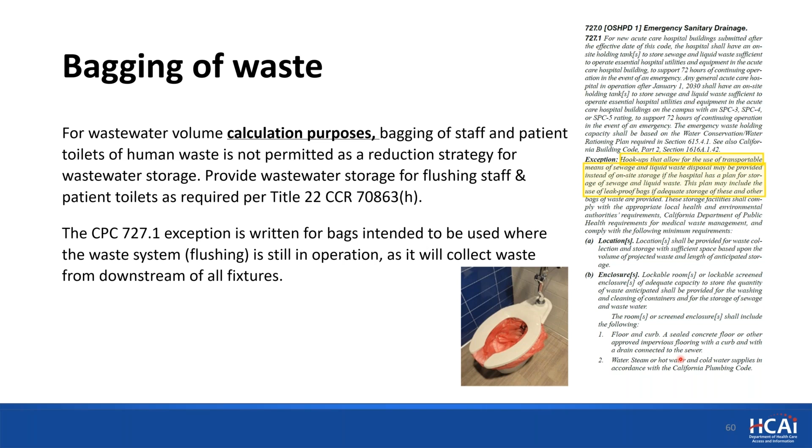Another item that's discussed often is bagging of waste. The plumbing code exception is written for bags intended to be used where the waste system is still in operation, as it will collect waste from downstream of all fixtures. For calculation purposes only, bagging of human waste at staff and patient toilets is not permitted as a reduction strategy for wastewater storage. The red bags at the fixture collect waste before entering the waste system and require bagging at every waste fixture. We take no exception to facilities having such procedures implemented during an emergency. All procedures reducing water and wastewater while keeping hospital services functional are best practice and recommended, but for calculation purposes only, this volume cannot be reduced.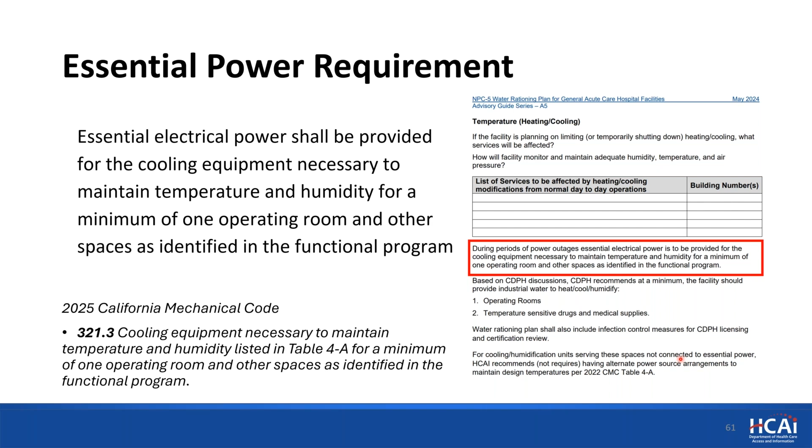Now let's discuss on-site wells. I'll try to hurry up a little. We're running out of time. Wells are probably the most reliable solutions for emergency water in which the hospital has to rely on itself for providing services. One important aspect of wells is that they are unique to each location.

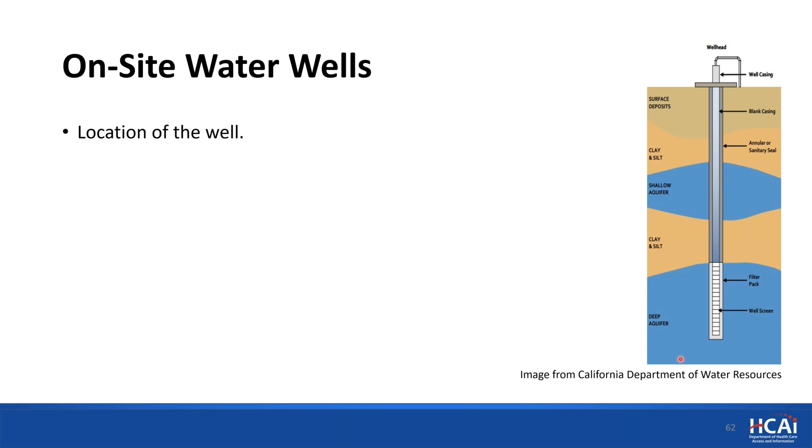So when submitting a water rationing plan with a proposal of using wells, please clarify where the well is located and who owns the well. If the well is not on property but located in close vicinity, please identify so in the evaluation report. The review will be on a case-by-case basis depending on the unique status of the facility.

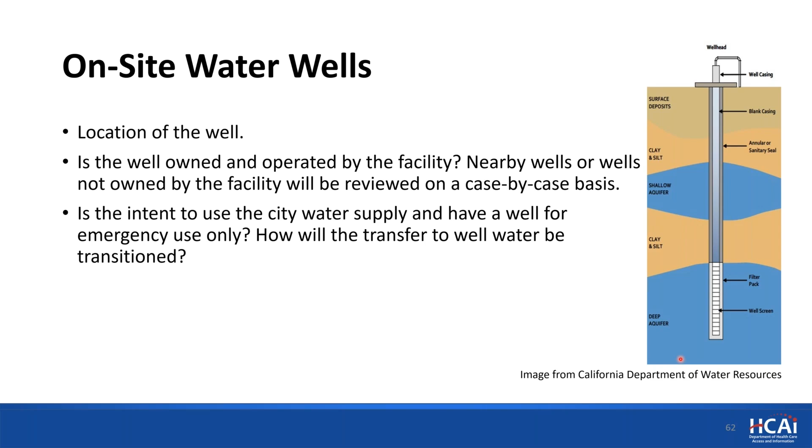Another thing to consider is the intent to use the city water supply and have the well for emergency use only, and if that's the case, how will the transfer to the well be transitioned? When working with well water, please address the water quality plan.

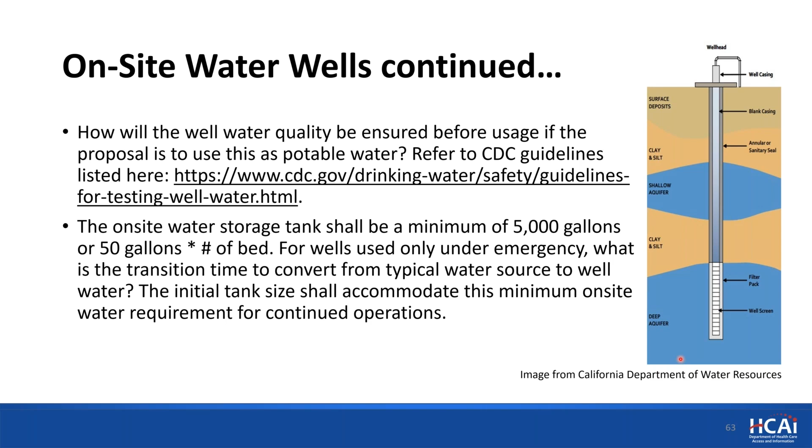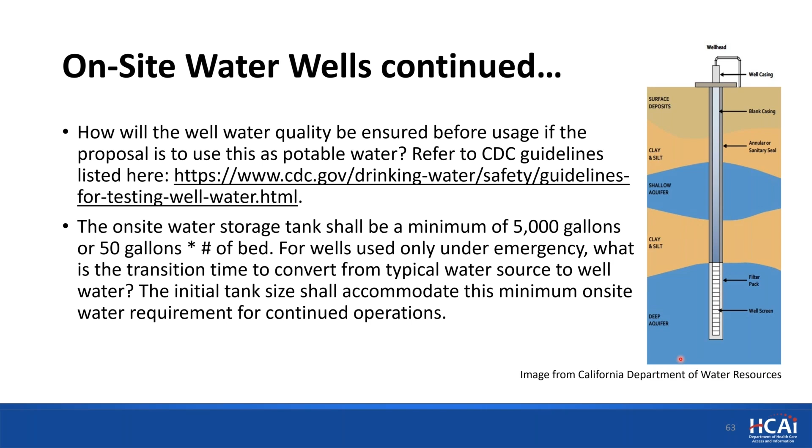And for the on-site storage that is required, if there is a well, the minimum storage requirement for the on-site tank alongside the well is 5,000 gallons or 50 times the number of beds. Again, if the wells are only used in emergencies, then the on-site storage tank requirement may increase depending on the time required to transition from the regular source to the well source.

This slide is just clarifying some stamping and signing requirements. The facility representative has to sign the water rationing plan. This provides an acknowledgement that the water rationing plan was prepared with close interaction with the facility. In some cases where there is no water rationing, the report can be submitted by the facility representative themselves without a design professional. But for any detailed calculations or fuel calculations which are required for NPC 5 for e-power, a licensed design professional shall stamp and sign them.

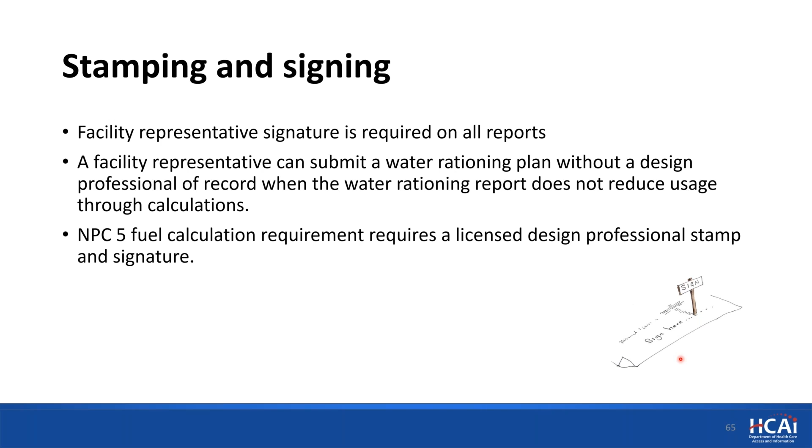For some reports where the proposal contains certain methods of water rationing, it shall consider shut-off valves, redirection valves, and the automated or manual processes that might be needed. When proposing shutting irrigation water or water to non-GAC buildings such as MOB structures, the design professional shall review the existing valve system and see if there is any need to consolidate them or to help the facility implement the emergency protocol.

In one of the previous slides, we discussed isolating the wastewater tank from the main sewage to avoid backflow. Similarly, having valves to isolate the main water to avoid contamination in case of a water break is also important. Also understanding the automatic fill line to avoid contamination. Any other automated processes using water that need to shut down, some of these could be automated and others might be manual. So understanding the facility infrastructure and helping them update their emergency operational plan is important.

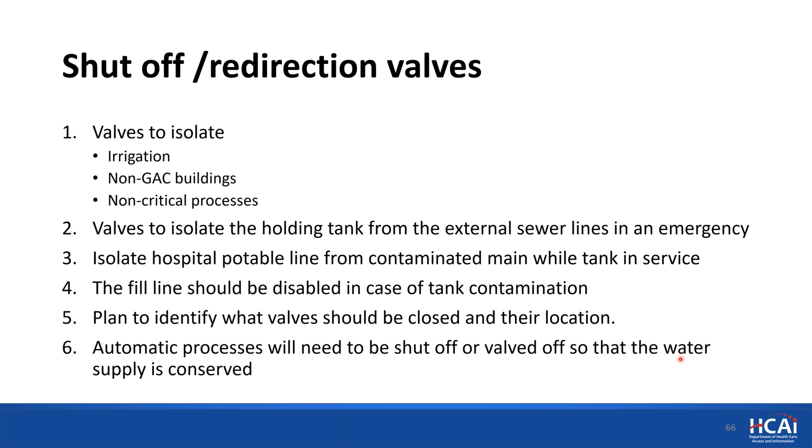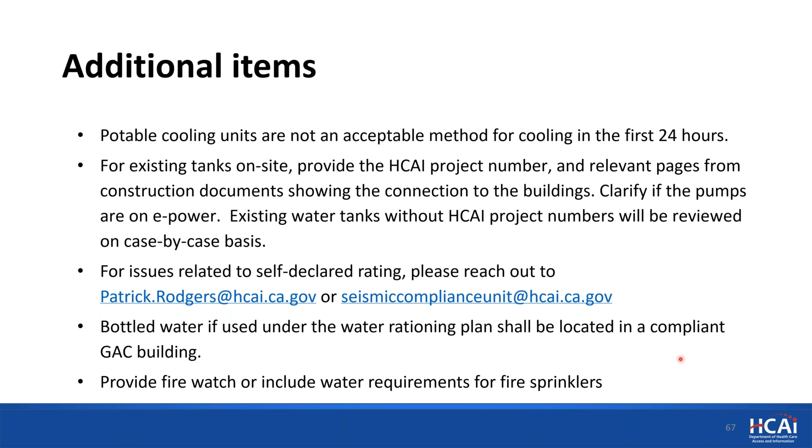If you're using bottled water, make sure that the bottled water is stored in a compliant GAC building. For Firewatch, please include Firewatch or include the water requirement for fire sprinklers. In some cases, you might have existing fire tanks, so just clarify which buildings the fire tanks serve, and the buildings that are not being served would still need a Firewatch.

So all these slides were discussing the HCAI portion of the review. Another important aspect of the water rationing plan is CDPH review. CDPH review is required when there is impact on services. In some cases, when the evaluation report was not clear on the impact on services, we did not submit the rationing plans to CDPH. So we highly recommend indicating the impact on services clearly. By not doing so, there could be a delay in review.

We have a checklist of items CDPH is looking for, and it's under the A5 guide as an appendix. Submission of this checklist is not required, but just provided for your reference. Again, this checklist may seem black and white, but it's not. There's always a case-by-case discussion. So please provide a detailed description of your proposal when it comes to impact on services.

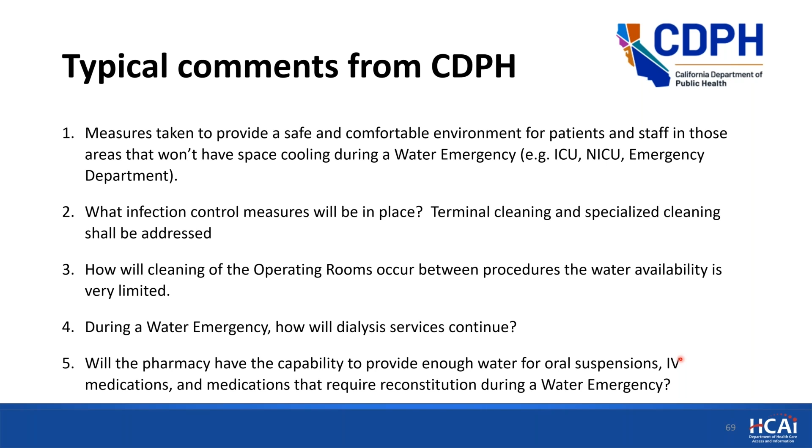Another critical service to maintain is pharmacy. So addressing if the pharmacy has the capability to provide enough water for oral suspensions, IV medications and medications that require reconstitution during a water emergency. Addressing how the hospital plans to keep medication stored in areas at appropriate temperatures for the duration of the emergency is another thing that we have seen CDPH ask.

For compounding rooms, please provide a plan for temperature control. If the temperature can't be maintained, what's the plan for compounding drugs? Is there going to be an impact on clinical lab services? How is ice provided from a sanitary source? Hygiene questions. Again, as you can see from the questions and the checklist from CDPH, these are basic operational questions. If there are impacts to services, please provide the plan for CDPH review.

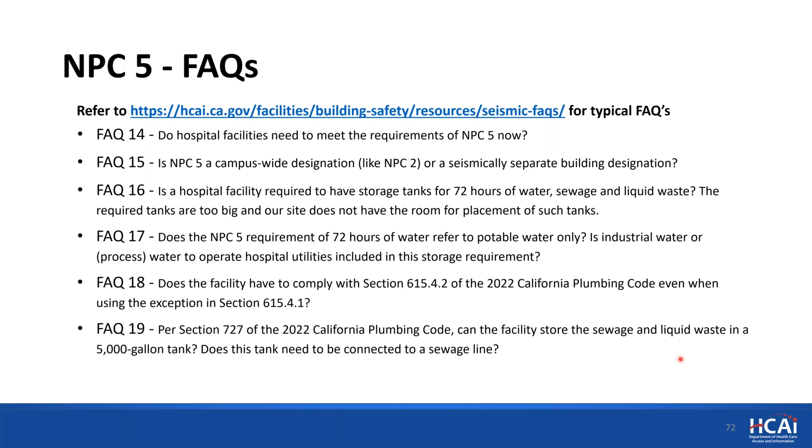I know it's 10. I just have 2 more slides probably, so I should not take too much time. I'll try to go through quickly.

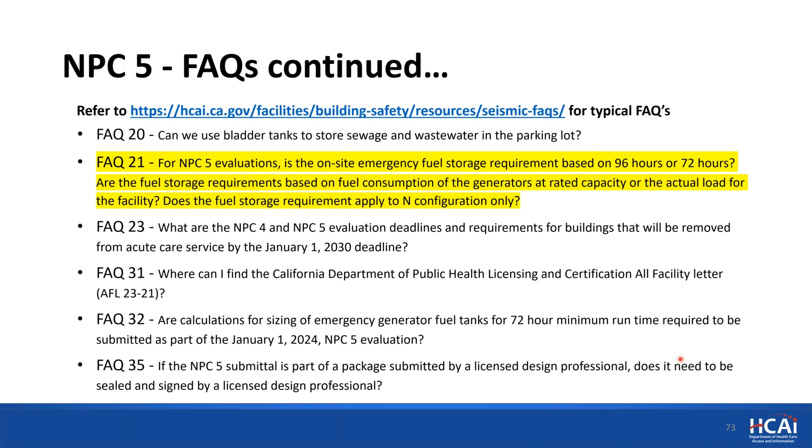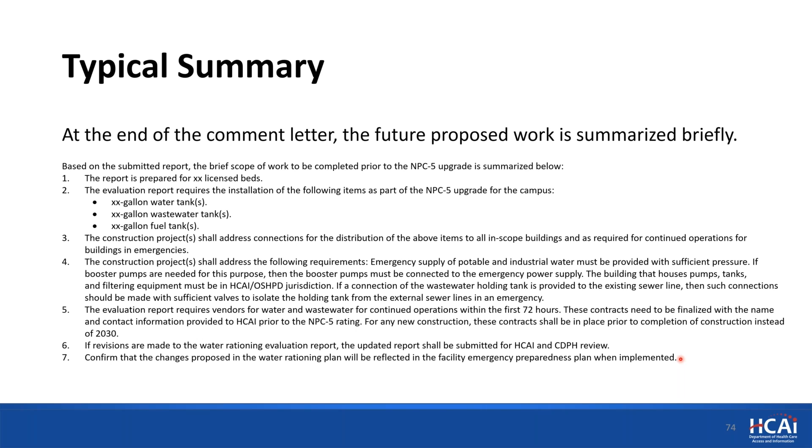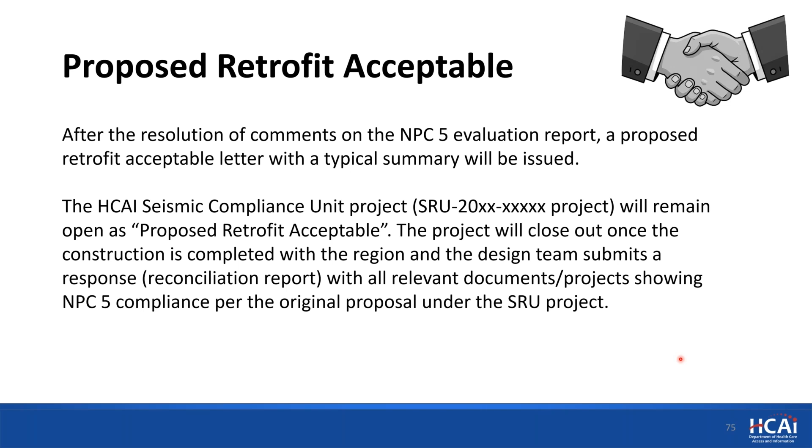The final goal of the evaluation report is to get a proposed retrofit acceptable letter. The project under which the evaluation report was submitted will remain open, and the same project number will be used at the end of construction by the design professional of record to submit a reconciliation report showing the completion of all NPC 5 related work to achieve NPC 5. Keeping track of all the related projects is important as this might be accomplished under multiple projects.